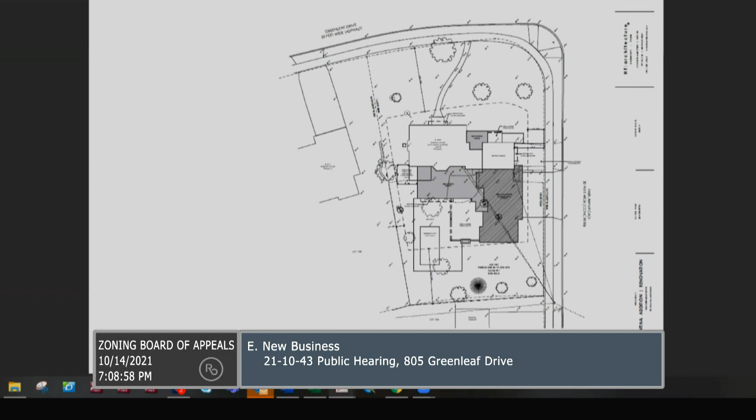I'll zoom in to give you a better understanding. They've done an excellent job with a survey, highlighting areas where they're proposing to conduct ground floor expansions of the existing house. So the modifications to the house result in a total accessory ground floor area, again everything dedicated to the attached garage. This is the existing detached garage, and they're proposing to expand it in this hatched outline area. That resulting floor area equals 1,480 square feet. And we'll take a look at their floor plan.

They've got some dedicated space in this accessory structure for battery storage, for a solar power system that they plan on installing. They've got a traditional 3-car garage element and then a storage space area. The ordinance allows for a maximum of 800 square feet, no matter what the lot size is. And this is a fairly generous sized lot at 0.36 acres, so it's 15,765 square feet. By comparison, that's about twice the size of the average lot within the city. But the ordinance does limit accessory floor area to 800 square feet, and they're seeking a variance to waive 680 square feet of that maximum.

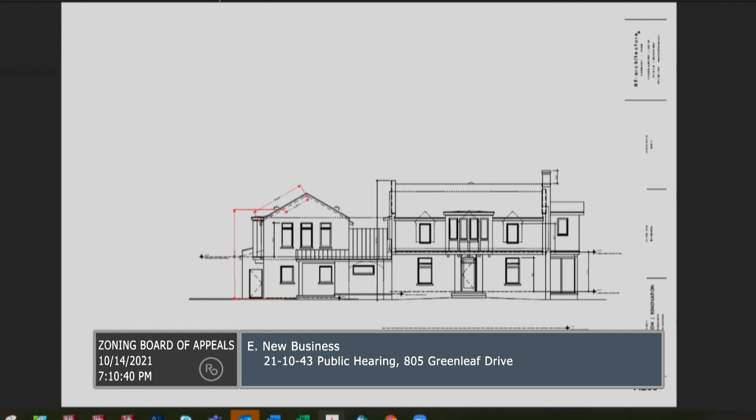I will jump to another page for some additional elements. This is representative of the front elevation along Greenleaf, and as you can see, they're proposing a second-story living space above the attached garage. The elevation and the floor plans are critical to identify the fact that from the second-story portion of the house, there's no way to access the second-story space above the garage. The only way to access the second-story portion of the attached garage is via an internal staircase at the ground level. There's no hallway, no corridor that connects the two portions of living space.

It's an unusual design, and the petitioner can elaborate, but it's to achieve a greater amount of roof area to install the solar panel system they want. The garage is physically attached, but we apply the height standard for a detached garage. As many board members know, the maximum allowable height for a detached garage is 15 feet at the midpoint, because there's no continuous living space connecting these two areas.

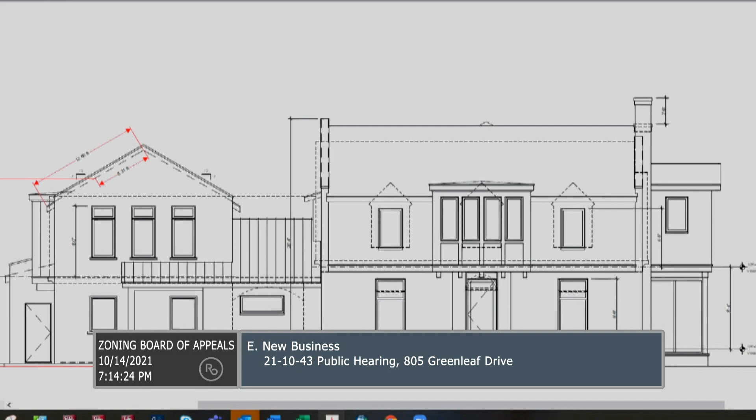I'll refer back to a different page for the last variance request. The zoning ordinance allows for a residential driveway to be no more than 25 feet wide at the property line. There's currently a driveway to access the 1.5 car attached garage. That driveway will be removed, and a new driveway will be installed to access the 3-car garage portion of the accessory structure. The driveway width shown is 28.5 feet wide, so they're seeking a variance of 3.5 feet from that maximum allowable 25 feet.

In order to have a driveway off of Fairlawn. We did not receive any audio public comment. We did receive two written email public comments that are included at the end of your report. And the petitioner is here to answer any questions you might have about their unique appeal.

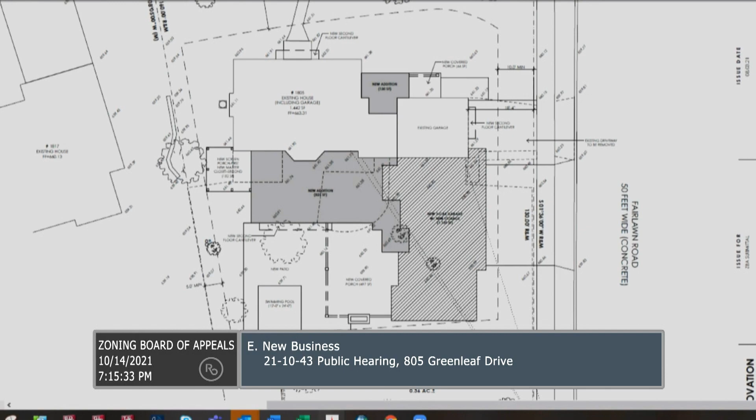Thank you, Mr. Murphy. I see Ms. Zukin has a question as well as Mr. Klatt. Go ahead, Ms. Zukin. Okay, Mr. Murphy, I got a little confused. You said that we consider the garage as detached for purposes of the height restrictions, but we don't consider it detached for purposes of a habitable area over it?

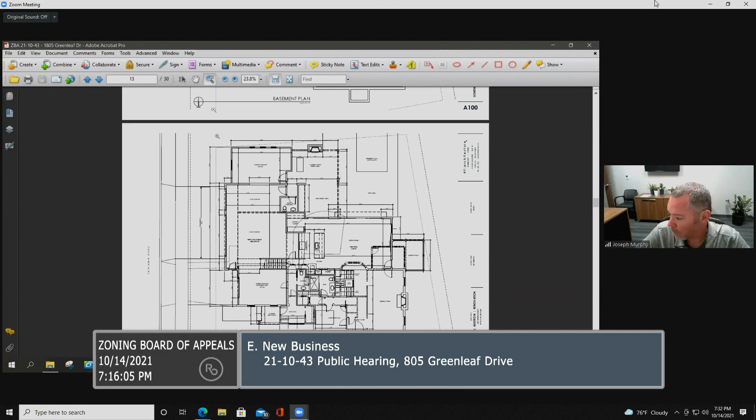Yes, and that is because, I'll share my screen as a clarification on why staff applied it in that manner. There is a hallway on the ground floor. The only way to access the space above the garage is via an internal staircase that's only accessible from the hallway within the house itself. There's no exterior staircase along the side of the garage, and there's no staircase within the garage that leads straight up to the area above it.

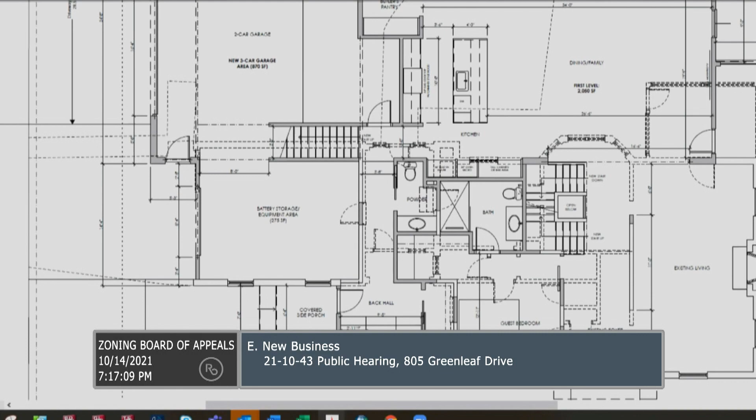The only way to get to the second floor space above the garage is via this staircase on the ground level. So we don't consider it a separate dwelling unit because it's an integral part of the floor area for the primary structure. It's just an unorthodox design from what we're accustomed to seeing, but we'll let the petitioner elaborate on why they selected to design it in that manner.

Okay, Mr. Klatt, you had a question? Yeah, I just wanted to verify that the overall lot coverage or footprint doesn't exceed 30%. I assume that's the case, but just want to verify. Yeah, I do know that calculation was performed. Let me look for that. Same holds true for the accessory component too, at 10%. Yes, I can look that up fairly quickly here. One moment. Thank you. Sure.

The accessory floor as a percentage of the lot is 9.4%, and the total lot coverage is 27.6%. So both are below their maximum allowed.

As the board knows, the ordinance is tricky in that it states an accessory floor area may cover no more than 10% of the lot, and in no instance more than 800 square feet. That 'no instance' really applies here since it's a much larger than average lot, so the 800 square foot cap kicks in before the 10% would even become effective.

So the last question - I noticed when I read through the petitioner's letter, their square footage breakdown was a little short from what you had. They had 3,850, but when I added the 750, it seems to shake out to the number you described at 4,600. So I assume it's just what they were calculating versus what you were calculating.

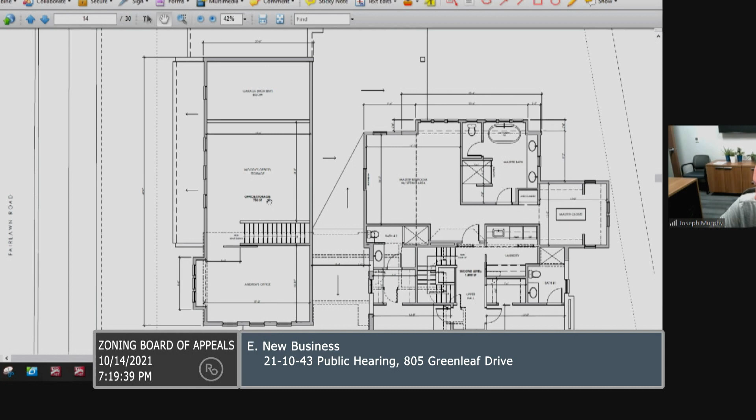The floor space shows two portions, both labeled as office slash storage. Again, they have that full height clearance under the building code to be recognized as habitable space. They don't show any plumbing fixtures or anything of that nature, but it's certainly a large enough space at 750 square feet in total.

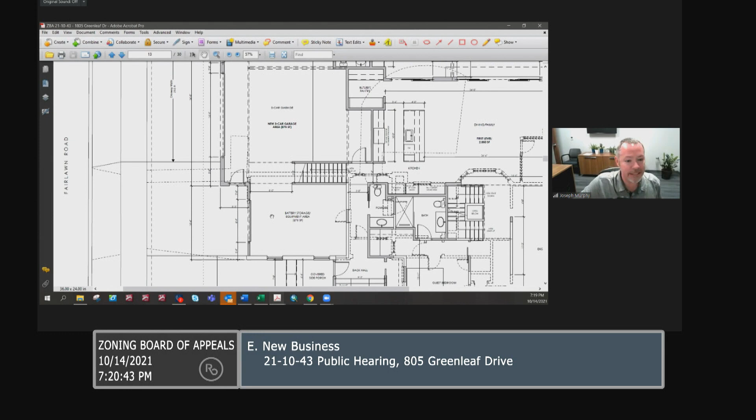There's the existing 1.5 car garage that they plan to repurpose, removing the driveway and repurposing it as battery storage related to equipment for the system they plan on installing. I'm certain that they can provide greater clarity on the need for that size and how the system functions.

Okay, yeah, I was just curious if that was counted as part of the garage because it's part of the old garage, versus being like a utility room type of thing where typically furnaces or such would be stored. Is there not a distinction for that type of space?

Well, a furnace room would typically be located in a basement, and if it was on the ground floor, it certainly wouldn't be 275 square feet in area. Okay.

We did label it as accessory floor area because it's accessory, equipment storage for a wide variety of things, but they did label it for their battery storage. Okay, thanks. It's not traditional living space.

All right, any other questions? All right, seeing none, the petitioner may go ahead and present. Please address who you are and your address, please.

Yes, thank you. It's Woody and Andrea Gantina. We currently reside at 1422 Edgewood Drive in Royal Oak, and I'm here with my architect, Brian Howard, with HF Architecture at 512 North Main Street in Royal Oak.

Thank you for the opportunity to bring this before you today. Our family has lived in Royal Oak for over 14 years, and we've fallen in love with this city. As our family has grown with a 14-year-old daughter and a 10-year-old son, so have our needs. We're very grateful to have the opportunity to stay in Royal Oak and build our forever home, the project that's before you today.

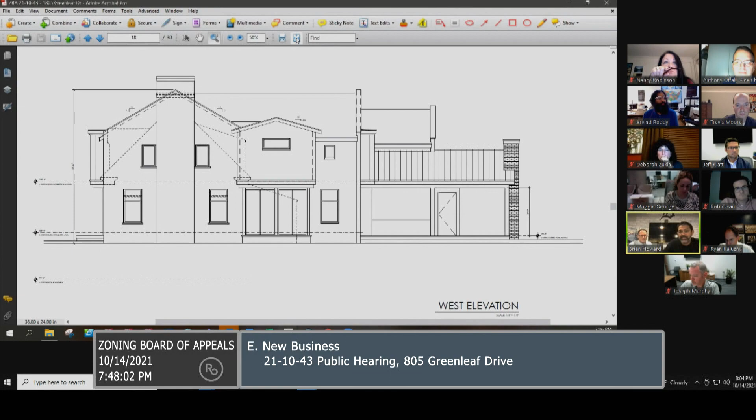So one item that we did have to take into account is maximizing as much south and west facing roof as possible. If you look at the home's design, the south elevation actually has limited areas of roof area that we would be able to put solar panels on, not zero, but limited, which then leaves us needing to maximize the west facing roof area. So we did take that into account in terms of how to design the roof plan itself so that we could maximize our ability to put the solar panels on there, but had to do it in such a way where we had to take into account what areas of the roofs would have the best solar exposure. So to answer your question, yes, the amount of roof area here, specifically on the south and west areas, is necessary to get the number of panels that will be needed for the home.

Okay, thanks, because that helps clarify at least some of the square footage need in my head. Makes it a little more understandable. But I was looking a little bit at some of this stuff because my father-in-law just put in solar panels on his house up in Chesterfield, so he doesn't have the space zoning restrictions we do, but he was able to do it quite easily. It's a very interesting and unique area, that reaching net zero seems to me to be a very different target than just getting a few solar panels to reduce your energy usage from the grid, rather than completely going independent, if you will.

So, did you have more? Oh, I'm sorry, did you have more to add to that, Mr. Gunther?

Well, it sounds like there's a little consternation over the size of the garage, as well as the comment about the driveway. I was wondering if it was okay to address those real quick. If anyone on the board has a problem with that—no one does. All right, go ahead.

So the 3-car garage that we're asking for is really based on the needs of our family. Currently it's just my wife and I that drive, but in the time that we're building this home, we will have a third driver in the home. That is really one of the biggest drivers for having a 3-car garage, which again we don't feel is inappropriate for the neighborhood, since there are many 3-car garages in the neighborhood on these large lots.

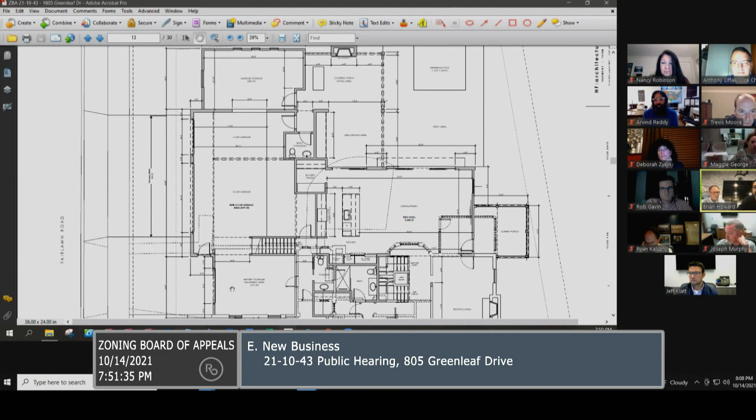All right, thank you. Coming back to this side of the board—any more discussion and or motions? Mr. Gavin: I move to approve all variances as requested. Is there a second? Ms. Robinson seconds. All right, Mr. Gavin—I believe the petitioner outlined many of the practical difficulty factors in his letter and that he read to the board.

To me, it is a lot, but in order to achieve this objective—which I think is a very laudable one, and one that the city certainly has as an objective and is currently working on a more precise plan to implement—getting the number of panels they need is a design factor that goes into this. And with the amount of roof space needed to accommodate those panels, the stuff under the roof has to be used for something, is the way I view it.

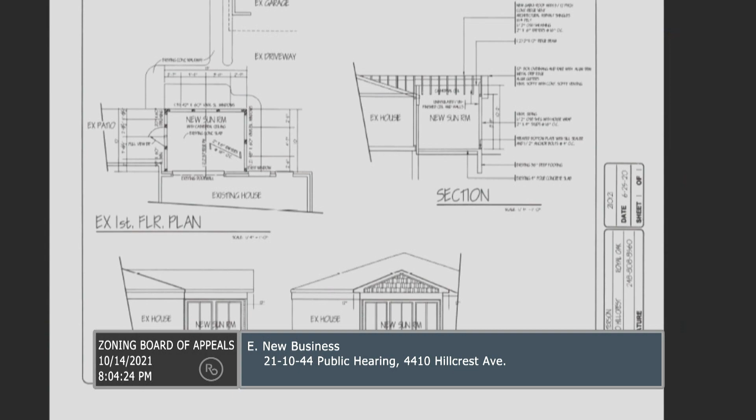And with that, since we have the petitioner here, the board can ask any questions they may have. I will note that we did not receive any public comment regarding this request. Is there any questions for Mr. Murphy? No questions for Mr. Murphy. Then the petitioner may proceed.

Uh-oh. There he is, there he is. Yeah, I keep putting it to my ear because I can barely hear you guys. Okay, well, you may introduce yourself and give your address, and then go ahead, present away.

My name is James Bishop. I work for Father and Son Construction. It is not my residence. I'm actually the contractor looking to do the work.

Yes. Okay. I can't figure out how to turn this up. So what was the question now? You can go ahead and present your case right now. Okay, we'll have questions we're wanting after.

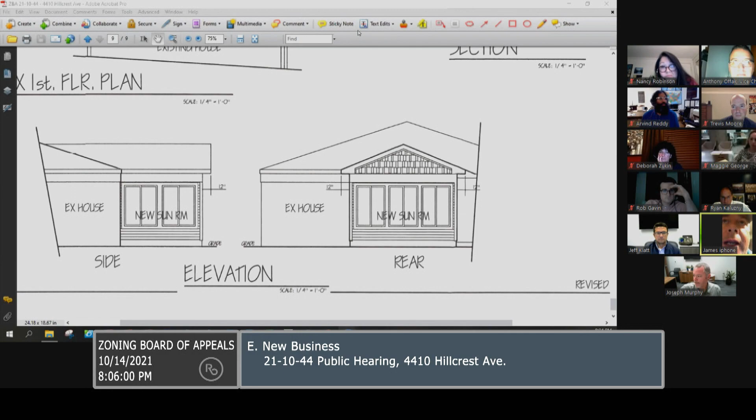What we're looking to do is take the aluminum enclosure down and build a wood structure with a wood reverse gable going back onto the existing wood roof. So essentially it's a 3-season sunroom now. We're going to take that 3-season room down with the aluminum awning and build a wood structure with vinyl windows and an actual steel door. We're not going to make it any larger than what it already is.

Okay. Is there any questions for the petitioner? Mr. Klatt, and then Mr. Gavin.

I assume the existing non-conforming structure was built by maybe a previous homeowner, meaning it's not the doing of the current homeowner? Yes, he said that was there when they bought the home.

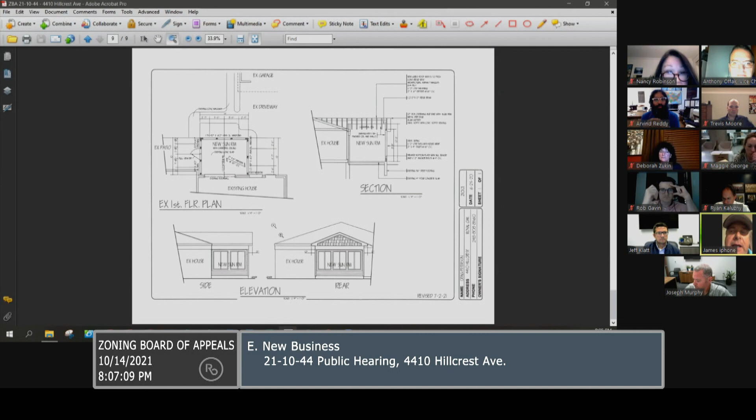Okay, and this is just an exact match, you're matching the exact size and shape of the original structure, correct? Yes, it has a shed aluminum awning now, we will be putting a gable. So the only difference between what's there and what we're building is the roof line will be slightly higher, because if you notice on that picture there, the roof line goes off the existing frieze. The new roof will probably be about 4 feet higher and be a reverse gable going back onto the existing wood structure of the home. But the actual footprint will not be any larger than what it is.

Okay, Mr. Gavin? I was just wondering if the homeowner, or you, talked to any of the neighbors, just to see if they had any objections. The homeowner told me that the neighbors on either side had no objections. As a matter of fact, I don't know what east and west is there, but if you're facing the house from the street, the homeowner on the right has a similar structure himself, it's not going to match it exactly, but that's what we're looking to do. I don't know if you had a chance to go out and look at the site and noticed directly to the right of this home, there's one similar.

Okay, any other questions for the petitioner? Ms. Robinson? The foundation that was there, you're using the same foundation that's there currently, is that correct? Yes, the foundation and the current slab.

We did a test hole. We are going to have to underpin it. It is only at a 36-inch depth now, so we are going to dig along the side and underpin the existing footing to get to the 42-inch depth which is required by code. Good, thank you. Any other questions for the petitioner?

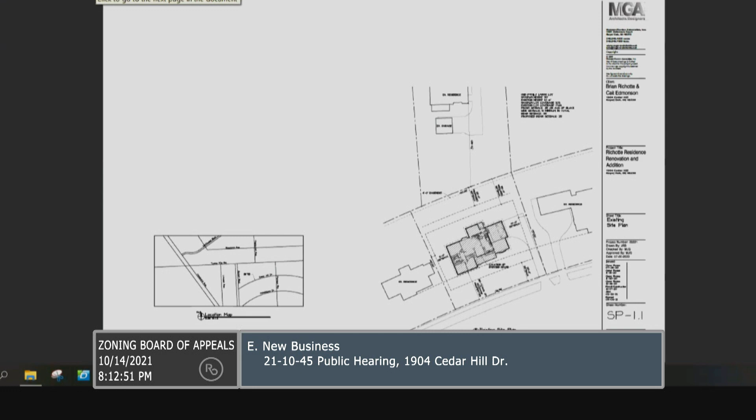I will say the one design element that is common is that the petitioner proposes a one-story covered porch, with an extended roof line from the house, along the rear of the dwelling. That's the one design that's consistent. And the ordinance allows for terraces, patios, decks, and similar structures that do not have a roof line, walls, or support columns, to project into the required rear yard setback.

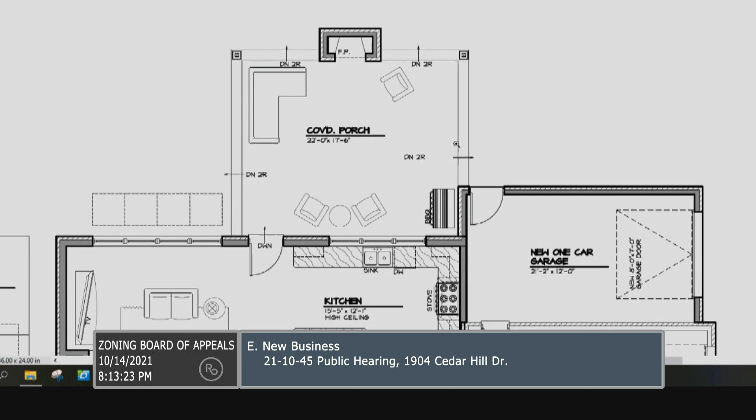But this design, and I'm going to refer to the elevation, doesn't meet that standard. As you can see, it's an extended roof line of the house, and it does project into the minimum required rear yard setback. The petitioner's done an excellent job of highlighting that on their site plan, where they've noted the 35-foot setback with a dashed line, and the measurement to the nearest point of that covered unenclosed porch is less than 35 feet.

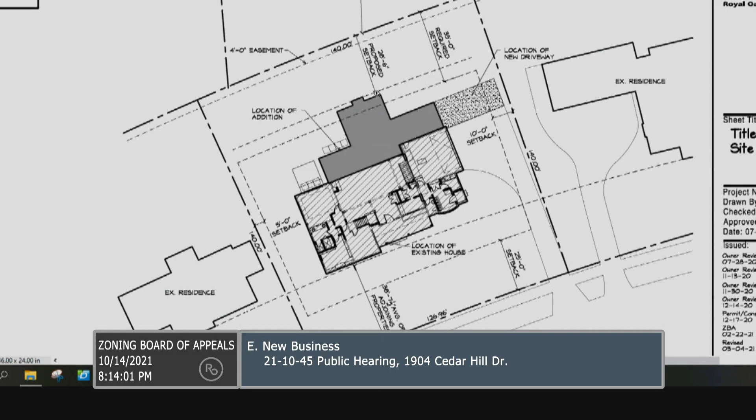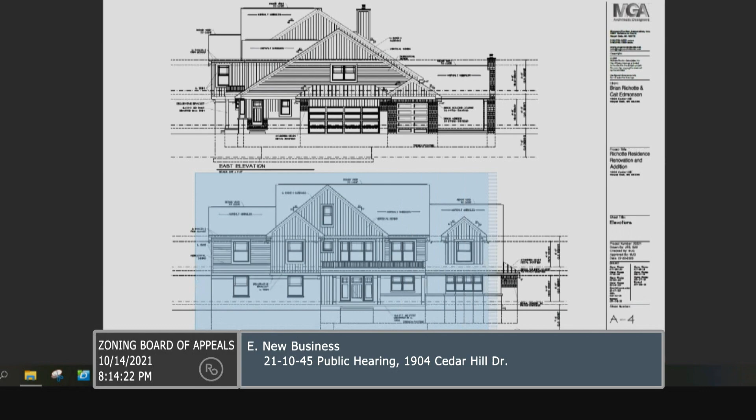So they're seeking a variance associated with that. The petitioner is also proposing to construct some additional living space on the ground floor area and a second story. I'm going to refer to the elevation. I think the front elevation is helpful, showing the attached side entry, attached garage, and a full second story along the front side of the house. According to the petitioner's calculations, we'll jump over to their floor plans.

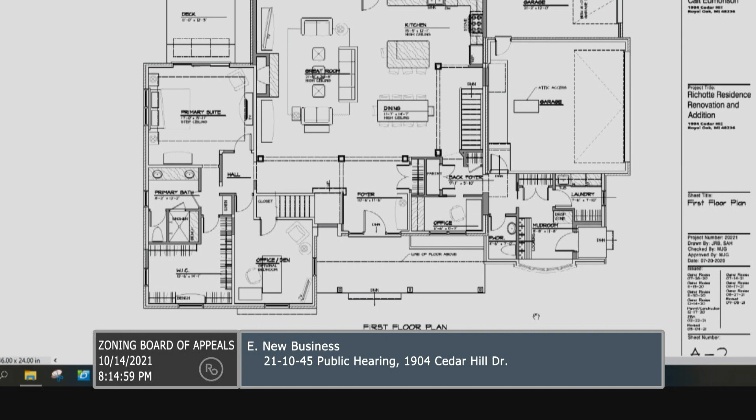The ground floor has a living space that does not include the attached garage or the covered rear porch. They would have a resulting floor area of 2,600 square feet for the ground floor. And the second story, looking at the floor plan, is a partial second story floor area, so it does not extend across the entire rear portion of the house. This front area, according to the petitioner's calculation, is an additional 1,178 square feet of living space, relating to 3 additional bedrooms, a bathroom, and a loft space.

And you can see off the corridor, what they highlight as a future corridor adjacent to a bedroom is additional space above the attached garage. And that space meets the full height clearance in order to be considered living area.

While the petitioner has noted a future corridor and a future intent to complete that as living space, staff, because it meets the height clearance requirement, did include that space in its calculation, and that space in and of itself is an additional 682 square feet.

So if we take the sum total of the ground floor, the second story living space for the bedrooms, the loft, and the bathroom, and the additional space above the garage, that equates to 4,460 square feet of floor area. The maximum allowable under the ordinance is 3,500 square feet. So the petitioner is seeking a variance of 960 square feet from that maximum allowable.

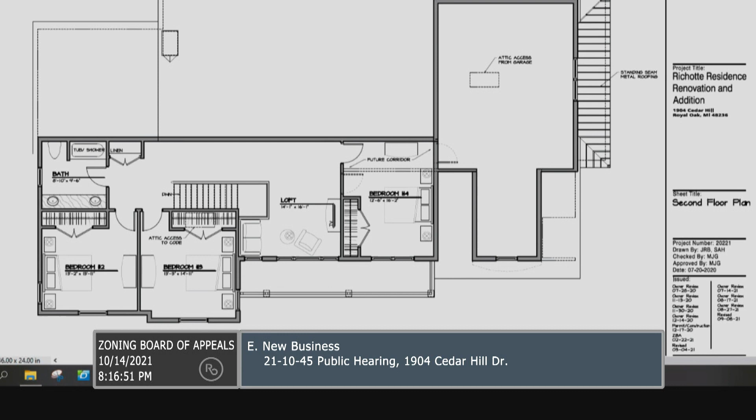We did not receive any public comments with regard to this request, and I'd be happy to answer any questions that you might have. Any questions for Mr. Murphy? Ms. Zukin.

Mr. Murphy, when they were here in April, am I correct that they were seeking a waiver of 10 feet from the 35-foot setback, and now they're only seeking 8.5 feet? Or is it a whole different thing?

No, you're correct in that the variance request, the design element, is the same. The placement on the property, which necessitates the variance request, is different. So now it is a different variance request than previous.

Right. Any other questions for Mr. Murphy? Mr. Moore, and then Mr. Clift. So if I'm looking at that correctly, according to their drawings, the only access to that space above the garage right now would be like a hatch type of thing in the garage ceiling, like an attic access, maybe a pull-down ladder type of thing.

Sure, yes, it could very well be a pull-down ladder. That's very common. But that area, confirming with the petitioner's designer, is a full height clearance, and the fact that they've noted on there that it's a future corridor to access it, we did count it because it's capable of being used as living space, and if the intent is to do that in the future, the need now for the variance request is to have assurance that it can be constructed in a manner to be used, whether now or at some point in the near future, as living space.

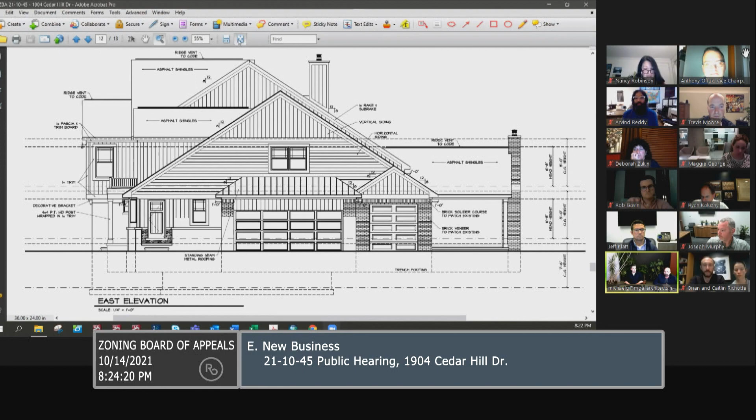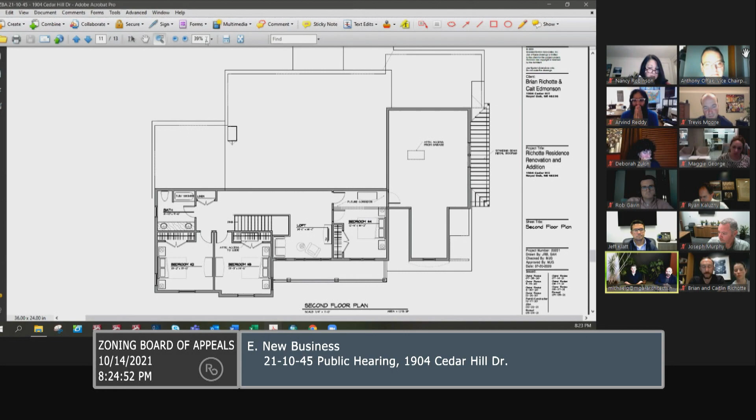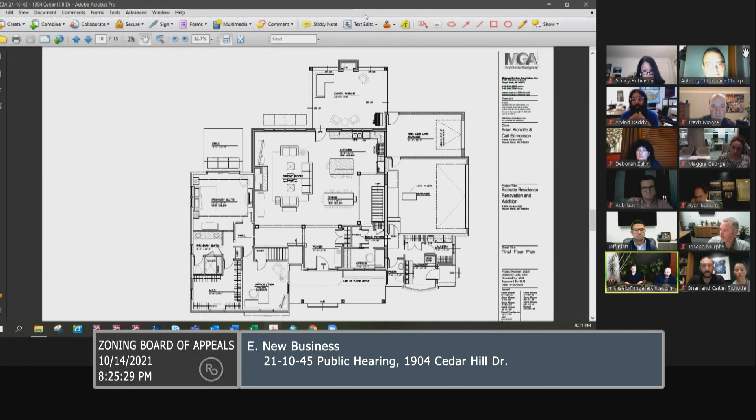We feel that the placement in the middle of the back - the covered outside entertainment space, the privacy fence, the landscaping, for all the same reasons we presented last time - has no impact or very little impact on any of the adjoining neighbors. Again, I just want to reiterate, this is a very large lot. In fact, if it wasn't for the 3,500 square foot limit that is imposed, and if we followed all the other ordinances for lot coverage, height restrictions and setbacks, we actually have a 5,000 square foot buildable footprint that would still maintain the 30% lot coverage. So we don't think this is excessive for the neighborhood or for the site, and we hope you look favorably upon this. Like I said, I think we're sensitive to keeping as much green space around the home as was originally there. We'll be happy to answer any questions.

And the homeowner is with us, Brian, Caitlin, and if they need to address any issues or concerns, I'm sure they'd be happy to pipe up. Thank you. Okay, thank you.

Do the homeowners have anything else to add to this? No? Okay, I can't hear you anyway - can't hear you, that's okay, but we got nothing. All right, is there any questions for the petitioner? Anyone?

Okay, seeing none, before we bring it back to this side of the table, as you note, we are short one of a full board. We can either proceed and vote, or we can table this till next month, your choice. The homeowner has indicated with a text message they would like to proceed. Okay, we'll bring it back to the side for discussion and or motions. Anyone?

Don't all jump at once, I guess. Anyone want to kick off discussion or motion?

Mr. Klatt: For the sake of discussion, I'll make a motion to approve. Is there a second? Ms. Robinson seconds. Go ahead, Mr. Klatt.

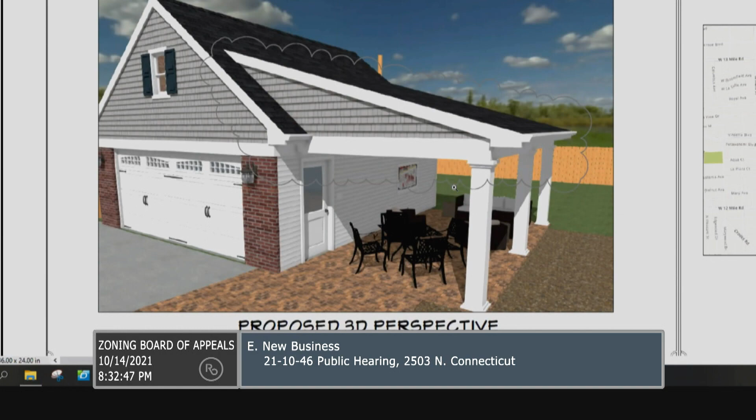Based on the lot size, the petitioner is allowed a maximum garage size resulting in lot coverage of no more than 10%. This proposal results in a total accessory floor area of 11.7%. So the petitioner is seeking a variance of 1.7%, about 119.5 square feet, from the maximum allowable 10% coverage for accessory structures. We did not receive any public comment regarding this request. I can answer any questions the board may have.

Mr. Klatt: Mr. Murphy, if the petitioner built the same exact structure but attached it to the house—say the back side of the house—would we have any issues? Doesn't sound like it, assuming same footprint, same structure, just attached to the house. I'm going to bring it up on the screen.

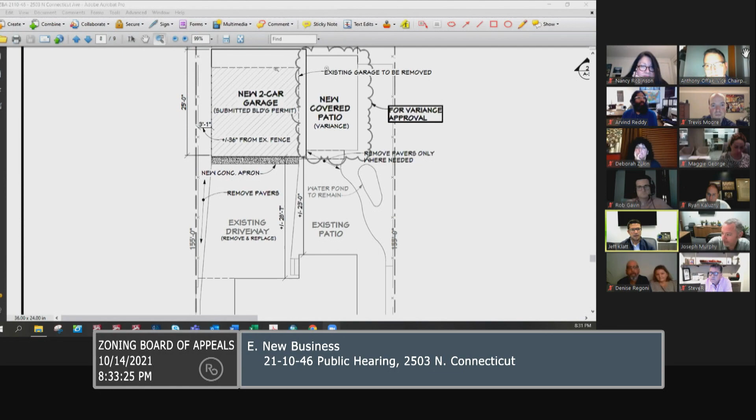I'm assuming you're referring to the covered patio. Right, yes, correct, sorry, I should have clarified. The new covered patio. Yes, and that's similar to what you saw in the last request.

That is something we have considered in the past, and because it's associated with a separate structure sharing a roof line, we consider it an integral part of the overall structure. It's an accessory structure, and we count it towards the accessory lot coverage. If it's a covered porch like the one you previously saw off the backside of the dwelling, with no relation to a separate accessory structure like a detached garage, we do not count it.

Yes, that is a good point of clarification. Oftentimes these are challenges for staff to make those determinations, but that's the way we've been applying it consistently for many, many years.

Any other questions for Mr. Murphy? All right, seeing none, the petitioner may introduce themselves with their names and address, and then go ahead and present.

Good evening, hi, I'm Paul Regoni and Denise Regoni. We've been homeowners here in Royal Oak for a little over 25 years. We've continued to improve and update the home that we live in here. We have a great community, great neighbors. We enjoy the space very much.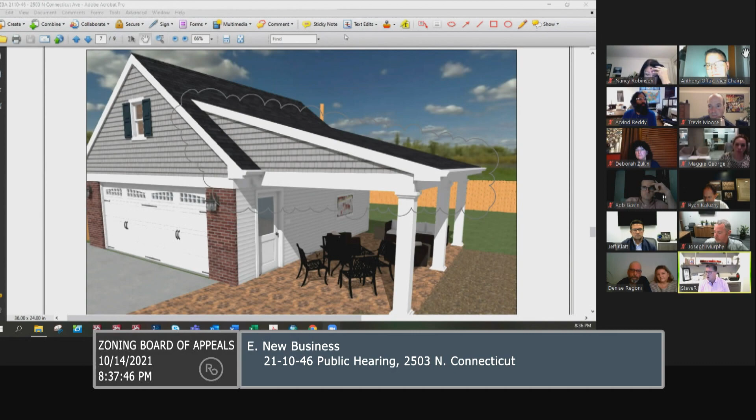And I guess the thing to note is with the patio they have out there already, we're not increasing any of the impervious surfaces on the property. I think with the roof structure, we're able to actually control the water a little bit better through guttering and diverting the water a little bit more where we want it right now. So I guess that's all I have to add to that.

Thank you. Is there any questions for the petitioner? Mr. Klatt: 2 quick questions.

Number 1, did you reach out to your neighbor to the right to get their opinion on the structure? We sure did, on both sides of us, and both of them were very approving and gave positive feedback. The neighbor to our north, their comment was they were just a little jealous.

And I guess second question kind of leads to the question I asked Mr. Murphy earlier: did you consider attaching it to the home to avoid this variance request? And again, I have no idea of your interior layout, how it would connect to the house, if there's doors leading out through it, but did you consider that, or are there issues that prevent you from doing that?

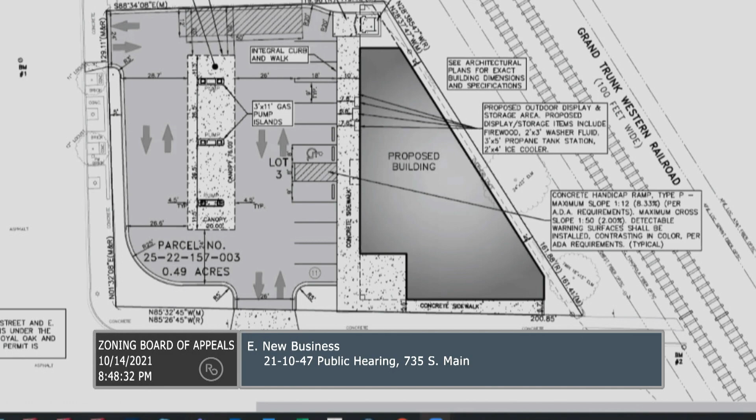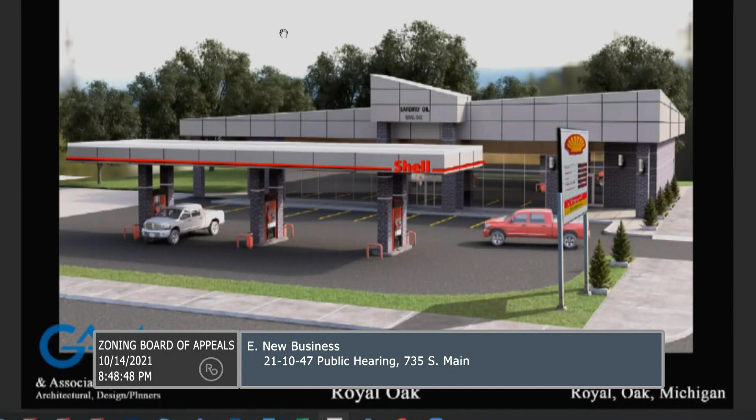The petitioners provided floor plans of the proposed convenience store, and they've also provided a rendering for you to consider. We did not receive any public comment with regard to this variance request. I can answer any questions the board might have before we have questions for the petitioner.

Okay, so Ms. Zukin, then Mr. Klatt, then Mr. Moore. Ms. Zukin: Mr. Murphy, you used a term I haven't heard before, extended longevity. What are you referring to when you say that?

Yes, it's currently a non-conforming use, and this would be an investment that would—I'll bring up the photographs if board members are not familiar with the site. This is a filling station that was arguably built many decades ago and has not seen a significant amount of investment, for a wide variety of reasons, and it doesn't meet the standards of today's fueling stations.

So to take this non-conforming use and modify the site with that amount of investment is extending a non-conformity at the site. This is a non-conforming circumstance that's lingering, and one might argue it's coming to the end of its useful or functional life. That influx of investment to create a much larger convenience store and new pump islands is a significant investment that would simply extend the longevity of the nonconformity, keeping it at this location for many years to come.

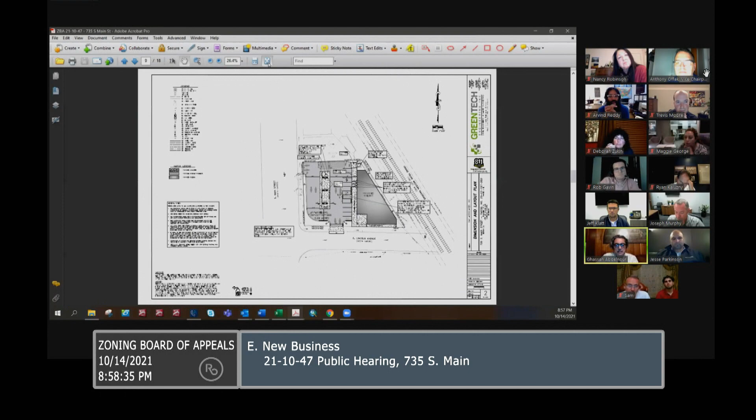This existing site has two canopies. If you go to the existing site, Mr. Murphy, there are two canopies, and in real life they don't meet the setback requirement. If you have one car at the side of the pump, no other car can pass by it. So in general terms, the circulation in this gas station doesn't meet the new standards of circulation for our shopping center, for our gas station, for our retail.

So instead of just putting new brick and new glass on the existing building to make it a little pretty, we wanted to do something more conforming to the future. Mr. Murphy is right, we're going to fix that because it's always going to be a gas station. We're trying to fix it to make it look good for our downtown.

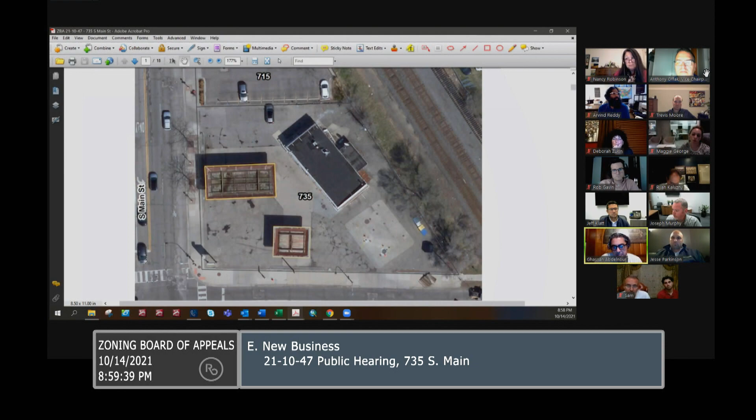So we looked at it, trying to do first better circulation on the site. The owner told me it's very important for us to come up with a design for the building. If you go to the rendering, Mr. Murphy, we tried to make it look a little more like a retail instead of a gas station. So we used every element possible to make it more like a shopping center, like a store, like a retail, trying to make it more downtown.

So we used the brick, we used the limestone, we used the metal, we used the nice wood ceiling under the canopies. We created a little cut, we have the metal siding on the top that's actually kind of matching and makes it a little more lengthways, to create a little more retail look.

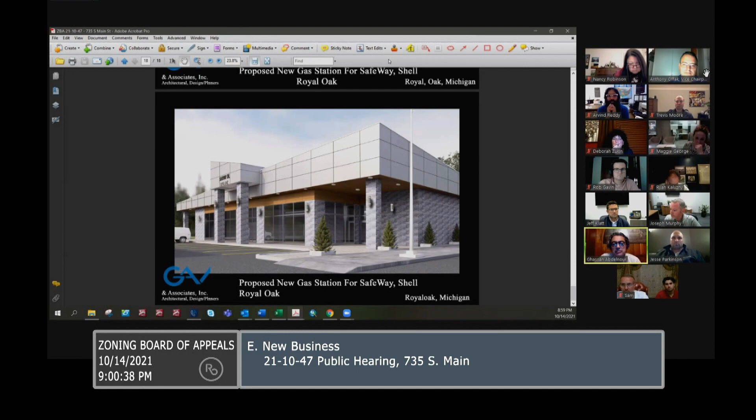At the same time, we didn't make it just like a box. We went into some areas of the gas station and created intersections. We created the roof to go over the dumpster. On the other side, we created an area where people can stand, so it's not just a flat building. We want it to look more like a downtown store. You do have the canopy in front of it.

We did work on the canopy. We added the brick, the limestone. We're planning to make the canopy match the same metal as the building itself. We're trying to add these lightings on the building to give it some character. The light only goes up and down, just to give it a nice look at night, because this gas station might be 24 hours, and we want to create safety for the people.

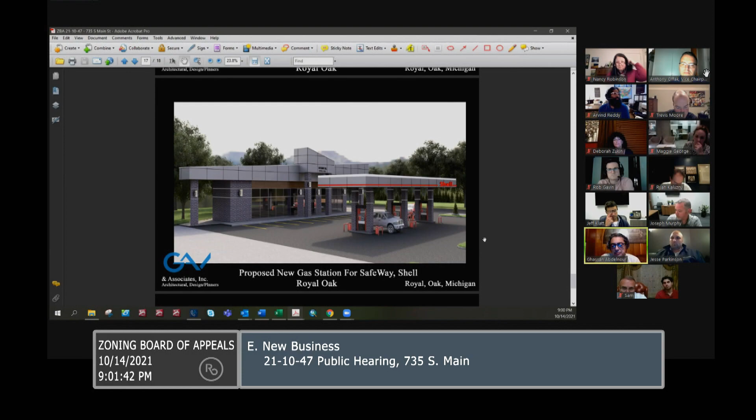At the same time, the way the building is designed, we went through the whole front but only played with the back. We followed the shape of the lot and covered, for example, the railroad track. So we wanted the building to face more as a retail, but at the same time hold all the stuff that's in the back.

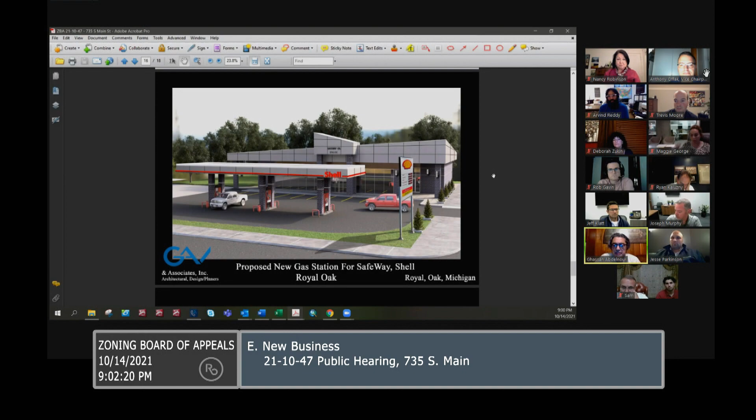We're planning to work with you on landscaping. We're planning to get your advice. We're here not only to get a variance, but to get your input. If your input is that we need to do something good, we would love to work on it. We're also creating a store that's good for the neighborhood, with better service inside, maybe milk, whatever a gas station will provide. We have a lot of doors.

We're trying to make it that kind of attractive, have your coffee. The main thing in Royal Oak, this is not like any other gas station. This is a walkable street. People walk on the street. There's a lot of condos, a lot of houses behind it, and a lot of retail that they might like to walk to.

The parking lot is important, but in this case, in the same location of this building, it's not that important. People walk to this building. We're part of downtown. I know Mr. Murphy said because this is non-conforming, so it doesn't meet the requirement.

CBD, the downtown parking - we do have a lot of parking on the street. People park on the street, we're allowed to do that. But at the same time, we're trying to provide 11 parking, and like Mr. Klatt said, I understand exactly. A lot of cities, when we design gas stations, they do add the parking for the pumps.

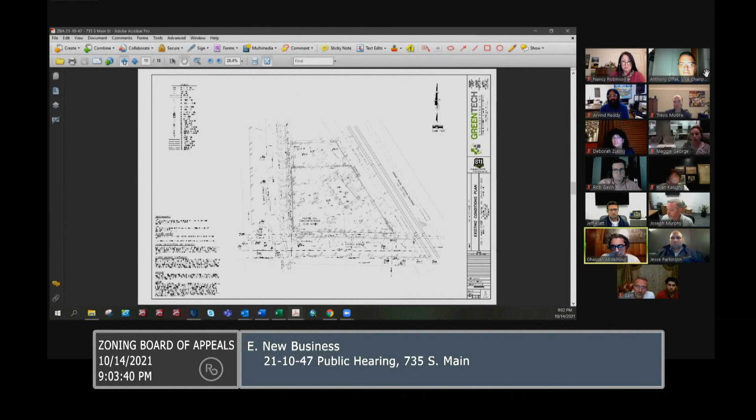We do have 6 pumps in that situation. We have 6 cars, and we have 11 parking. So really that's a big number. I don't think you ever see more than 17 cars in a gas station parking lot.

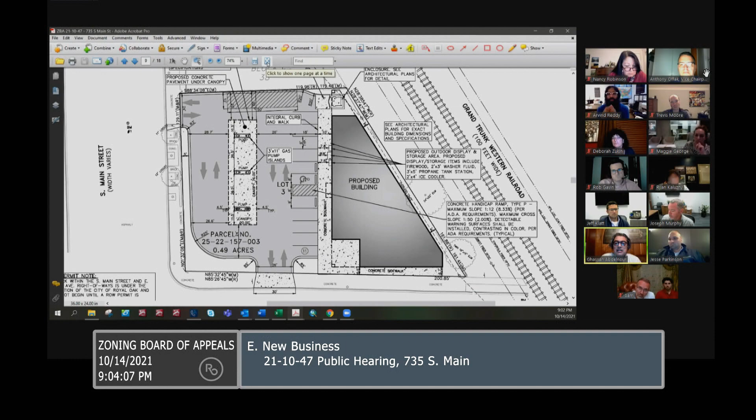Also, I need to talk now about the interior of the building. The building is around 5,200 square feet. The way we designed it from inside, the usable area - where the people will actually be in that gas station, only taking out the coolers and behind the counter - is equal to 2,800 square feet. 2,800 divided by 200 equals 14 parking.

So really, if we're going to use the usable space, we're talking about 14 cars. And if we want to go by code, the code says usable, because most of these coolers we really can't use - no people go into these coolers, so they're non-usable for the public. The only usable public space in this building is 2,800 square feet, and with the numbers, it's 14 cars.

So we do have 11, and Mr. Klatt made sense - I'm saying the 6 cars, because I do the same thing. We have 6 cars on the pumps, and we go into the building. But please, this is downtown, this is a walkable area, and we have parking on the street.

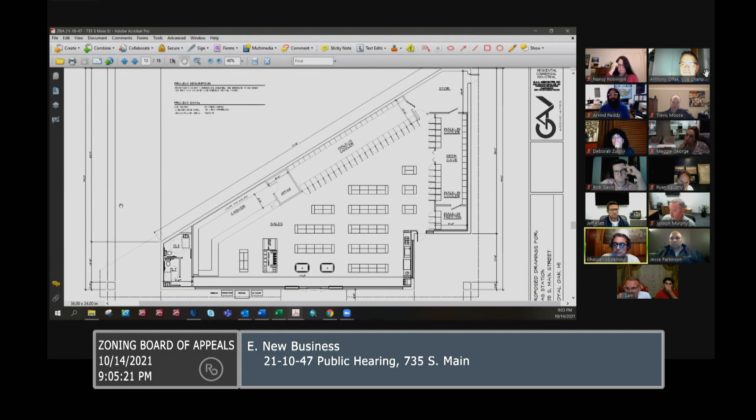We're trying to create a building that the City of Royal Oak can be proud of. I know it's not conforming, but this building's been there for a long time. If we don't fix it, if we don't make it look good, it's going to be tough for everybody - tough for the owner, but he's not going to get rid of it, and tough for the city because we have a very deteriorated building that needs a lot of fixing. Just adding brick and paint isn't going to make it look better.

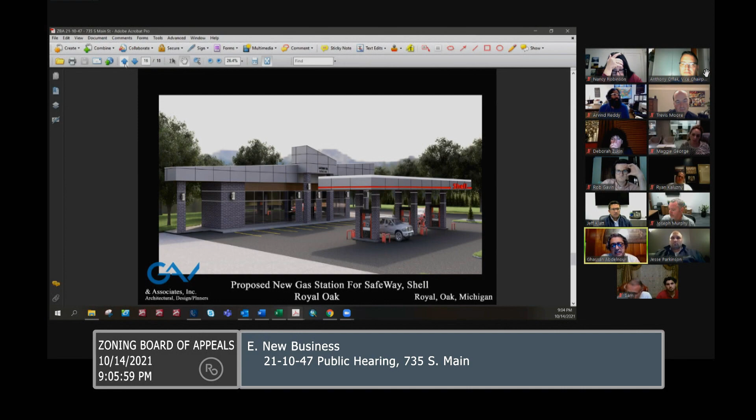The circulation outside, the existing one is in pretty bad shape. By taking out these 2 entrances from Lincoln and Main Street, it's a big deal actually. Most of the new gas stations we're fixing, we're taking these entrances out because they're creating some accidents. So we're going for safety - safety with the light, safety with the new canopies that meet the new requirement, and safety with new landscaping to create a better building for the City of Royal Oak.

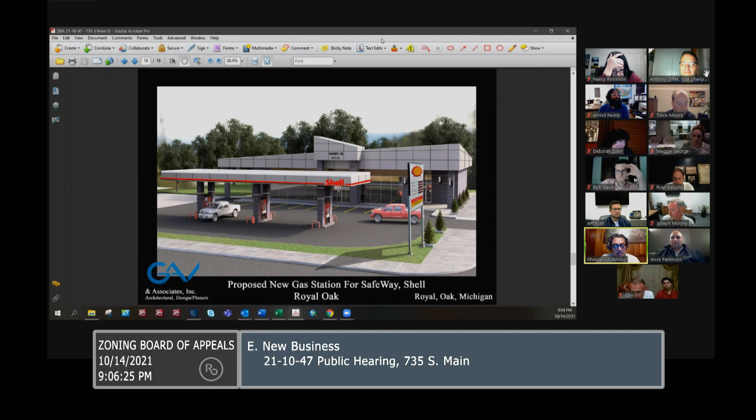The only thing here, we're begging you, and we want any suggestion from you to help us see if something we need to fix, something we need to do - we're willing to work with you. The owner owns a lot of gas stations, but this location is very important for him, let's put it that way. So he told me that we want to make it look good - whatever it takes. I want the city to be happy. So that's why we're here in front of you.

I don't know if Jesse has something to add, but also we're taking all the tanks out, we're fixing any issues. Usually this lot has phase 1 and phase 2 done, so no environmental issues are in it. We're taking the tanks out, cleaning the site, and rebuilding everything from scratch. So actually, environmentally, it's better for the neighborhood, it's better for the city, and we just want your help.

We're here in front of you. If you feel that you need to give us advice, we're willing to retable it and go do that advice you ask us for, and come back in front of you. But please work with us - it's a great location in downtown. Main Street needs a better gas station, and I'll take any questions you have.

All right. Is there any questions for the petitioner?

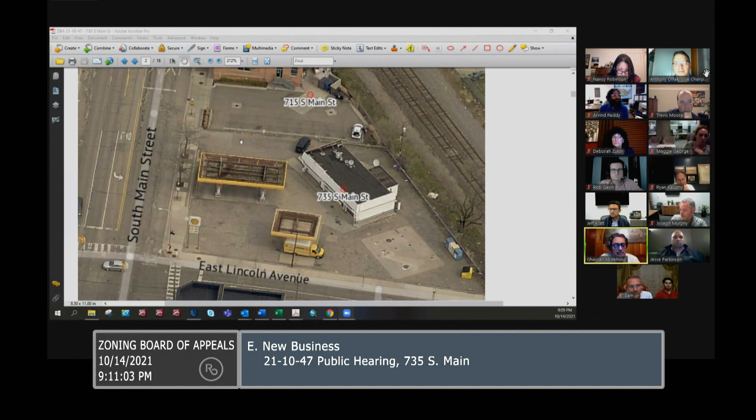The site, we do have 2 canopies. One of them, the pump is very close to the side, so when the guy is pumping, he's going very close to the edge. So really there's no two-way street over there, so that would create some issues and hardship too. At the same time, we thought, just for safety from the back, we try to enclose all the back area and also create a better, safe situation with the railroad station and more landscaping area to try to keep it safe for people walking on the street. In general, the safety of the building itself is deteriorating. We want to make sure - like I said, we can change the glass, we can put paint, but we're trying to do something better for Royal Oak and for the people living in Royal Oak.

Any other - Mr. Gavin, really just a quick comment. I've heard the word hardship a lot tonight, and I think everybody needs to remember we're looking for practical difficulty, because those are actually different standards legally. Mr. Reddy: But isn't one of them a use variance? Isn't hardship for use? Oh yes, you're right. Thank you.

Any other questions for the petitioner? All right, seeing that, before we bring it to the side - Mr. Murphy, since this is regarding use variance, am I correct in assuming we would need 6 affirmative votes for the expand, alter, non-conforming use, or am I incorrect on that? It's not - they're not seeking a use variance since the use is already there, and it would be a continuation of what we refer to as an alteration, expansion, or enlargement of an existing non-conforming use. So that's different than a use variance. A use variance does require 6 affirmative votes. This particular expansion of the non-conforming use requires 5 affirmative votes.

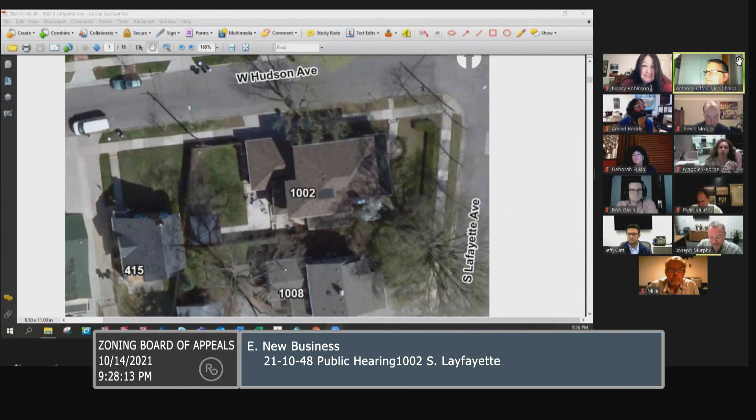This site is located at the intersection of Lafayette and Hudson. As you can tell from the aerial photograph in front of you, the site has a front yard setback along Lafayette, and the adjacent property to the west along Hudson has a front yard setback along Hudson. So the existing shed is located within that front yard setback of the structure at 415 West Hudson. The petitioner proposes to utilize the existing attached garage, which is accessed off of Hudson, and there is a detached accessory structure/shed located on the property as well. The petitioner is proposing to construct a 66 square foot addition to the north side of this shed.

We'll refer to their drawings - they provided some excellent drawings to give an indication as to what they're hoping to accomplish. That 66 square foot addition, outlined in red, is an expansion of that structure, and it's associated with the pool they plan on putting in adjacent to it. So between this structure and the house, they plan on putting an in-ground pool in. The shed structure becomes storage for mechanical equipment for the pool and for other aspects of outdoor living.

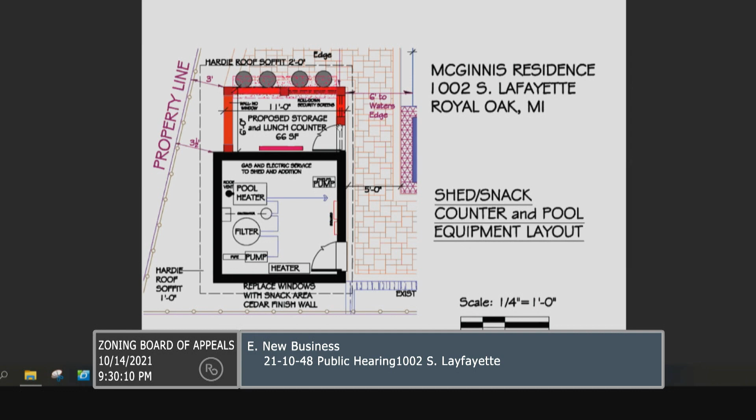Based on the lot size, the zoning ordinance allows for all the structures on the site. This is a comprehensive view that the petitioner provided - outline of the house in black, the proposed pool in purple/blue, and the structure in black with its expansion. By ordinance standards, the site currently maintains a non-compliant total lot coverage of 34.3%. Based on the lot size, the maximum allowable coverage is 30%.

The petitioner is proposing to expand that shed-type structure by an additional 66 square feet, so they're seeking to go further above and beyond the maximum allowable lot coverage, and they're seeking a variance to accomplish that.

The ordinance allows for all the accessory structures, and you can have up to two - again, they have an attached garage and the shed-like structure. The two of them may be no more than 10% of the lot area. By constructing the addition to the shed structure for purposes associated with the pool, that addition increases the accessory ground floor area to 10.6%, above the 10% maximum allowable. So they're seeking a waiver of 0.6%, which equates to 36 square feet from the maximum allowable coverage.

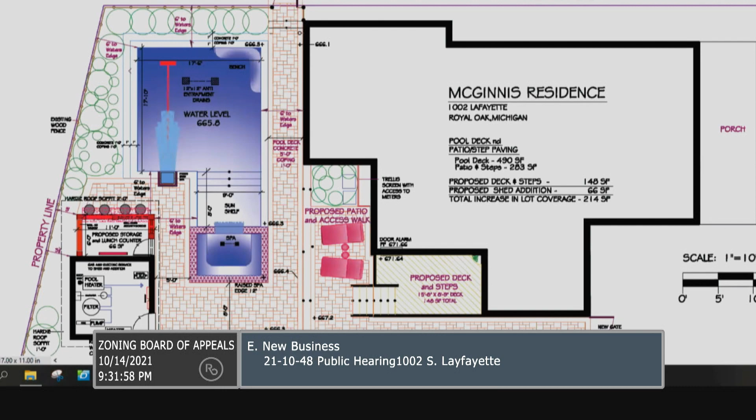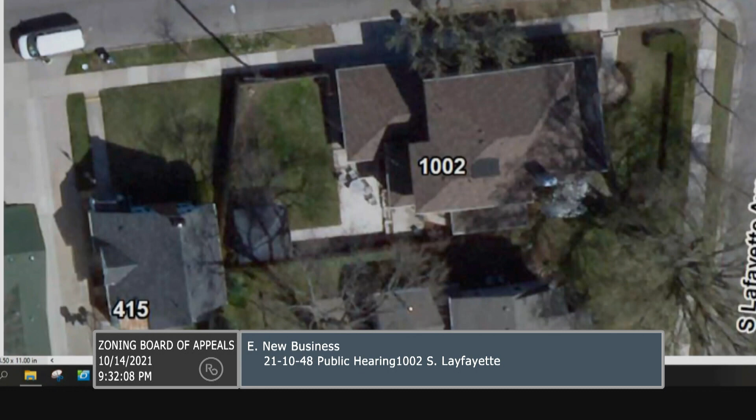Last variance request. Switching back to the aerial photograph: the site is located on a corner, and due to the orientation of the adjacent lot to the west on Hudson, the existing shed is within the front yard setback, beyond the front plane of the adjacent home. The shed is slightly set back further, but the expansion to the north side of this accessory structure projects out in front of the front plane of the adjacent home. Because it's a corner lot and no structure can be constructed within that front yard setback, the petitioner needs a variance to accomplish that expansion of the shed.

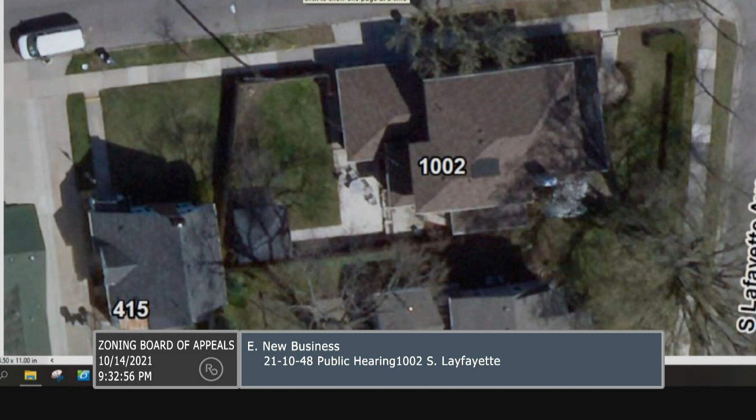I do have some photographs that I think are an excellent point of reference, which I can show on the screen during our conversation with the property owner. I also want to point out that we did not receive any public comment regarding this request.

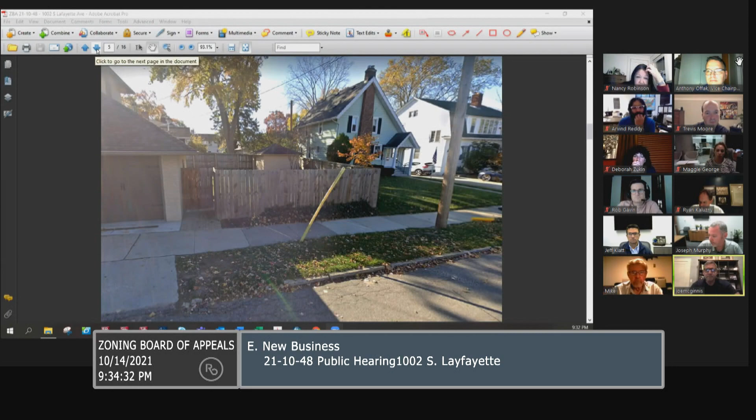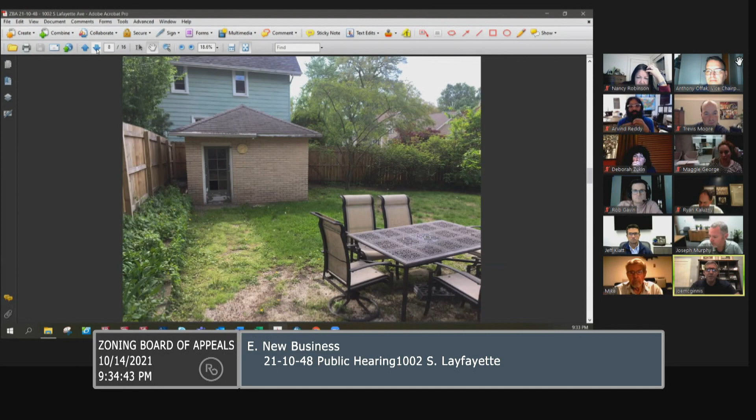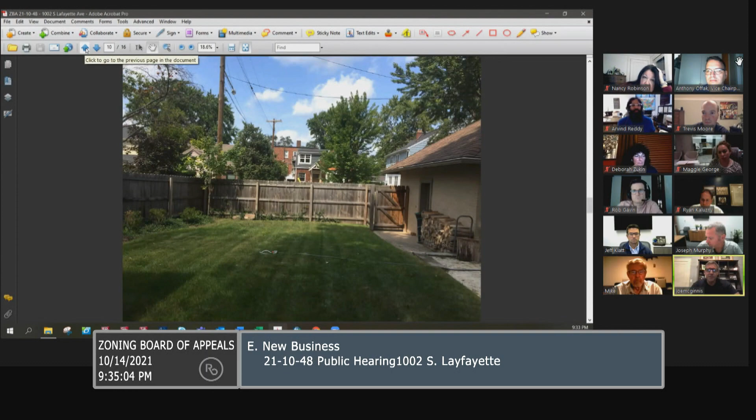But anyways, I'm just looking to expand the outdoor living space a little bit. If Joe shows some of the old pictures, it really was in disrepair in the backyard. I'm not sure how long the shed has been there, but I'm just looking to expand it. There's an older picture of what it looked like when I moved in three years ago. I just want to enjoy the outdoors — I enjoy swimming, and there'd be a kind of Michael Phelps swim machine in there, enabling me to get some exercise, which I would have enjoyed over COVID when it was more difficult to get exercise.

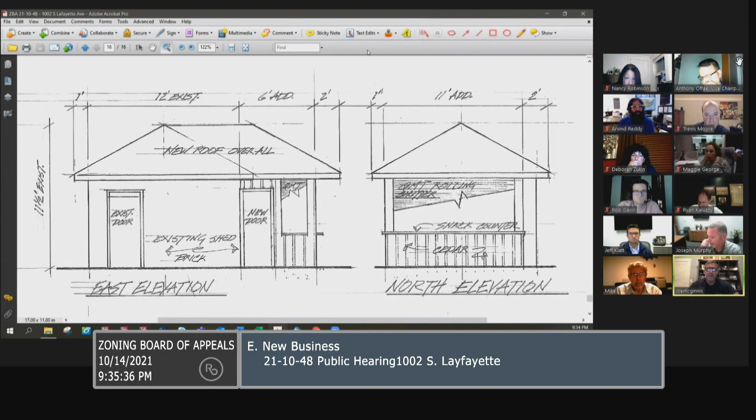I want to put a lunch counter on the end there, and also use this space for storage — possibly a lawnmower or things like that. There's a sketch of it, what I'd like to do. I was also going to put a small deck off the back door, since right now there are steps you immediately step down, which I think is a bit of a danger, but that's not why we're here today. We're here to talk about expanding the shed to give me extra storage and a little lunch counter on the end, like a cabana type thing.

Mike McGinnis, do you have anything to add? No, he explained the situation pretty well.

Okay, and may you state your name and address for the record? I'm getting two feeds, two volume feeds — is there somebody that can tell me how to shut the other one off? Yeah, I think you still have the public meeting on, you need to shut that window. That's why you're getting the double feed, because you're still listening to the previous meeting. But it's all right.

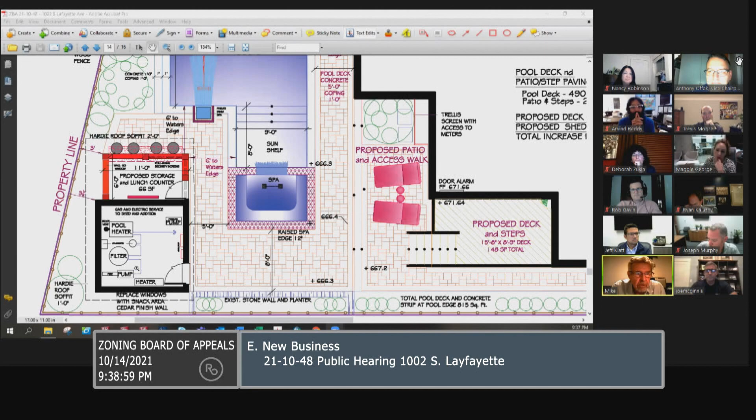I thought you could put a heater enclosed as long as you had the setbacks inside and vented it, but I don't know, I've never done that. The specifications for the heater do allow for venting, and the ordinance, I believe, would allow the vent to be extended through the roof. That's why the vent is inside the shed — it would go up through the roof rather than out the back of the shed against the fence. Right.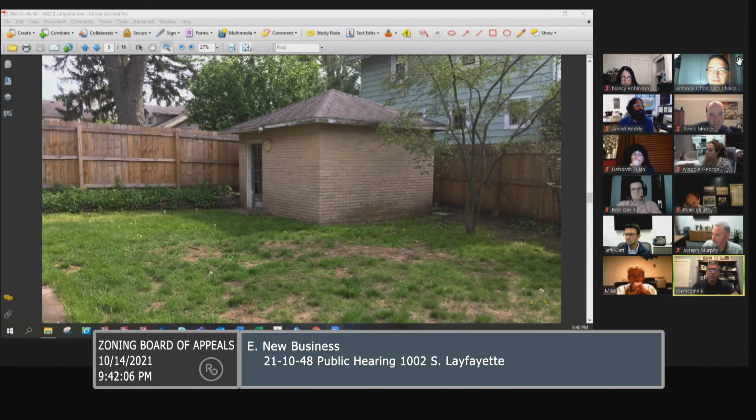I guess it's hard to say that there's a hardship. I mean, when you're putting a pool in, that's not a real hardship, but right now, putting all that equipment into the storage shed, I'd have to carve into the bricks, and my builders highly recommended not cutting into the bricks to create a lunch counter on the edge. He said it's an older building and it would be difficult taking out a wall of bricks where the windows or counter would go. So he proposed putting a little addition on there, the 60 or 70 square foot addition, and building it out of what is that material? Yeah, so basically here I'd have to take out all of these bricks, and I don't know how long they've been there, but it would definitely weaken the structure. So that's why he proposed doing some sort of Hardie board or extension on there.

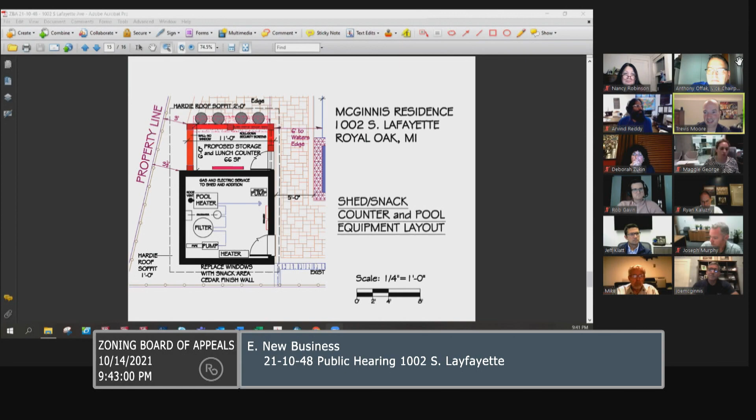Thank you. Mr. Moore: So I just want to make sure I have this clear. The addition is actually what you're calling a lunch counter, which in other variations somebody might call a sun porch or a covered enclosed patio space or something like that. That's the actual addition, right? You're not changing the brick walls or the equipment storage area, you're just basically adding on like the equivalent of what some might consider a sunroom attachment. Is that the correct understanding? Yes. Okay, thank you, just the area in red. And then the roof, would the entire roof be redone? So, okay, thank you, yep.

Ms. Zukin? Oh, sorry, Mr. Mike McGinnis, you were going to say something? Yes, I just wanted to address the lot drainage. Right now the site flows towards Hudson, and I know that we are decreasing the lawn area significantly, but we propose to use permeable pavers. Depending on the soil conditions, it depends on how much gravel we put underneath the pavers to absorb any rainfall. Okay, thank you.

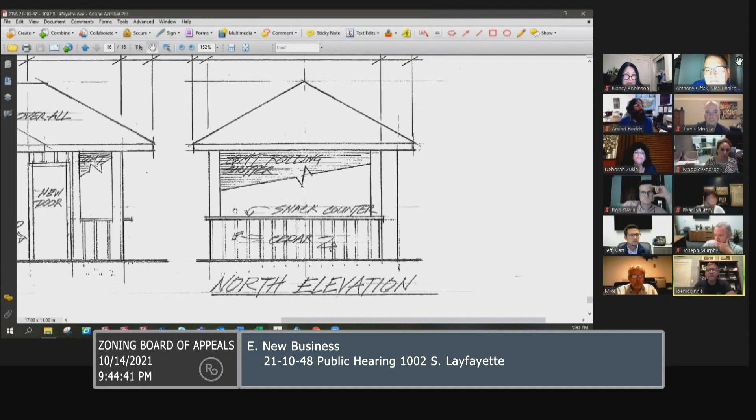Ms. Zukin? So is this space, this addition, totally closed in, or is it just covered? It'll be able to close in. It's going to have maybe a metal shutter that you can pull down over the counter window, and there'll be a door that you can open and close, because eventually in the winter I'd like to store items in there. So those windows will be like a rolling type shutter that comes down. Metal shutter.

Any other questions for the petitioner? All right, seeing none, before we bring it back to this side, we are short one person for a full board. Unknown if we will get a full board next month or not, so you can either have us vote on your variances tonight or ask to table it till next month. What would you like to do? I'd say let's try and vote. All right, thank you, we'll bring it to this side.

Is there discussion and/or motion? Mr. Moore: Yeah, I just want to say that I feel like this is a unique approach to an outdoor space, like a couple of the other ones we've seen today, and there's been several instances this summer of something similar. This is just a unique approach with the roll-up windows and calling it a lunch counter, where in other instances it could be considered a sunroom or a covered patio or something like that. I'll wait to see if there's other comments.

Anyone else want to comment or make a motion?